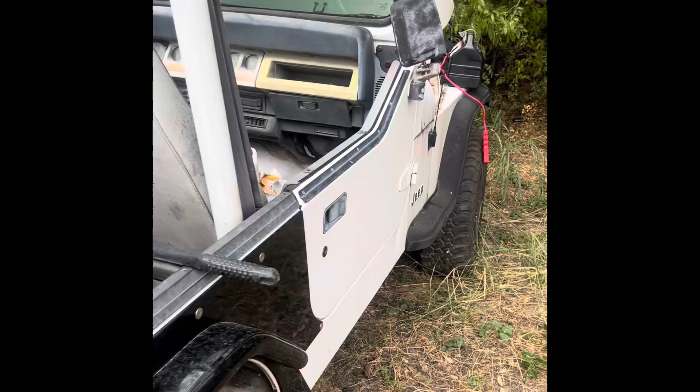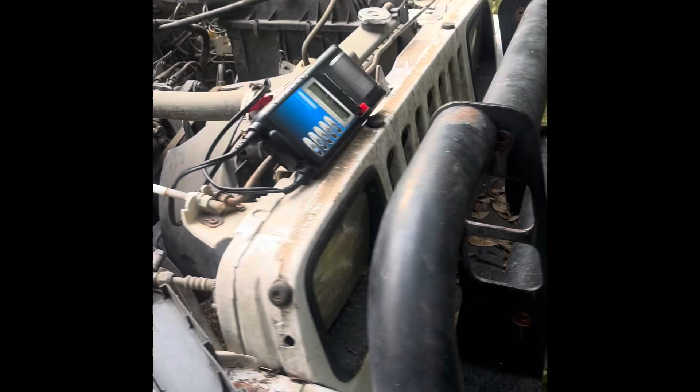Alright guys, look what I found sitting in somebody's backyard. We negotiated a price, and yeah, this is gonna be mine. So I just put an old battery in it to make sure we get this thing cranking. Found me a YJ. I had one before, fixed it up nicely, ended up selling it, and regretted selling it. Glad I found another one.

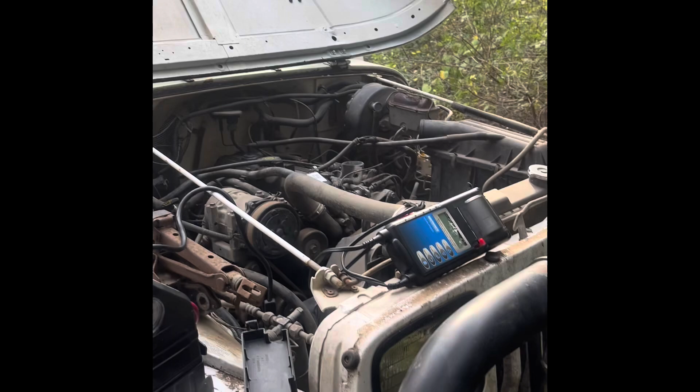I'll be posting about the progress. Here we are, show you some of the progress we made. Hopefully.

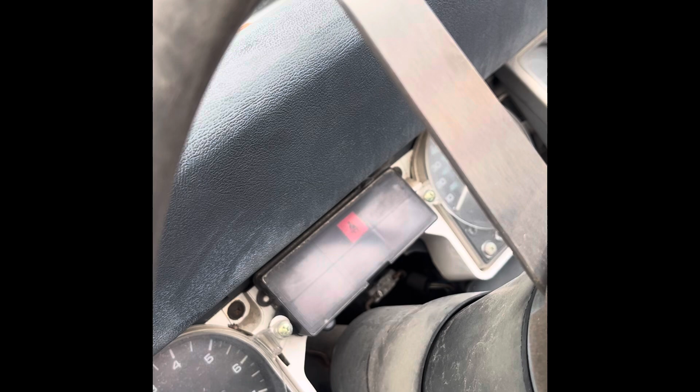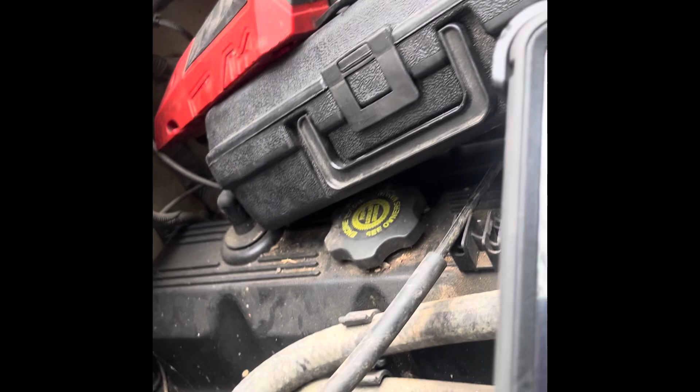It's cranking, but no check engine lights coming on the dash. I'll show you guys what I found so far. It's possible that light bulb could just be burned out, but I'm looking at the wiring diagram, and it shows the automatic shutdown relay.

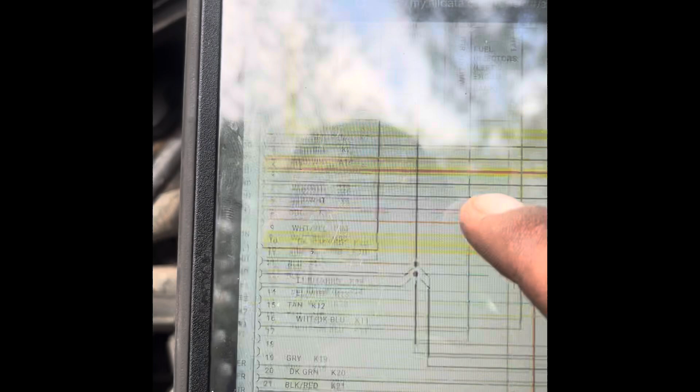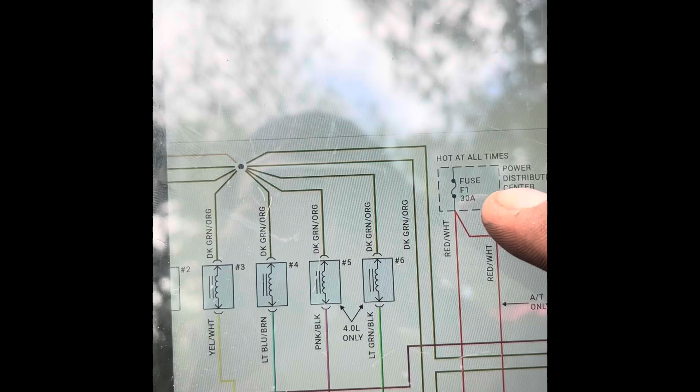It sends power to the computer. It's fed through two fuses, fuse 5, which I think is inside the dash, and the other one would be fuse 1. This one feeds down to the fuel pump relay, and also comes back and shares power, as you can see. So it feeds one point on the automatic shutdown relay.

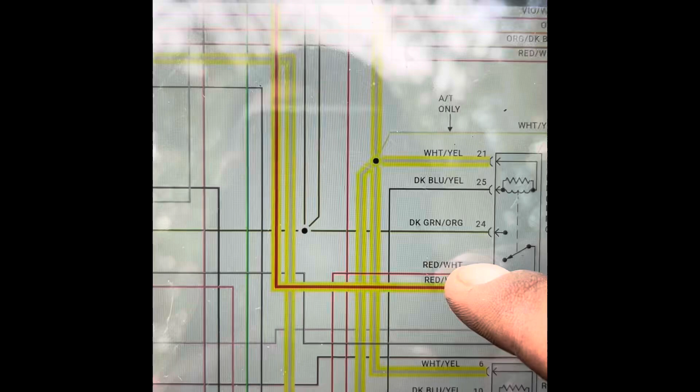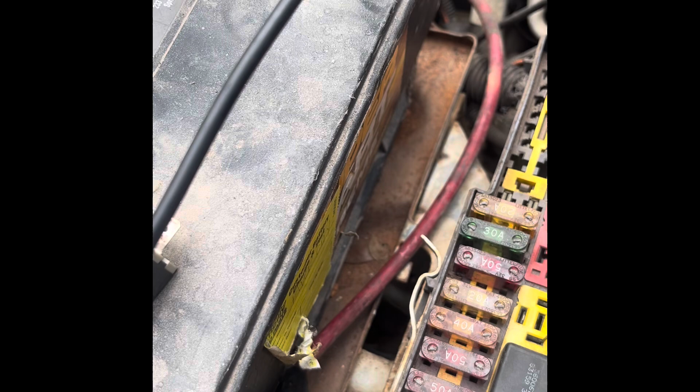So essentially we should have two powers on this relay, and I only have one. So here I'm at, I got it grounded. We have one power source, but these other ones, nothing.

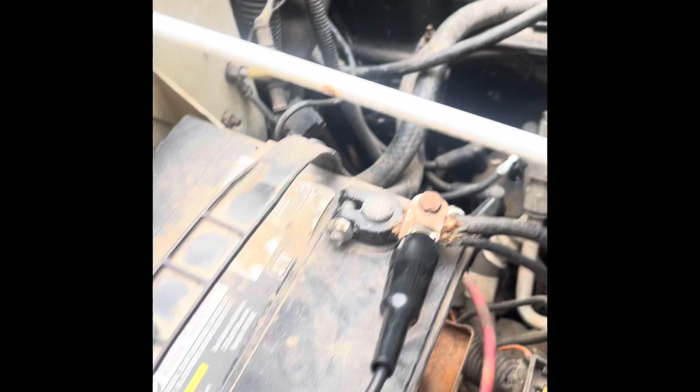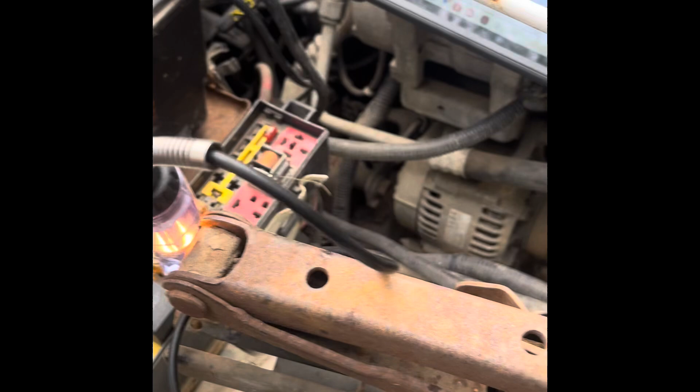So we're gonna look, to show you, this power source is coming from fuse 30. As soon as I disconnect this fuse, there you go. I'll put it back in.

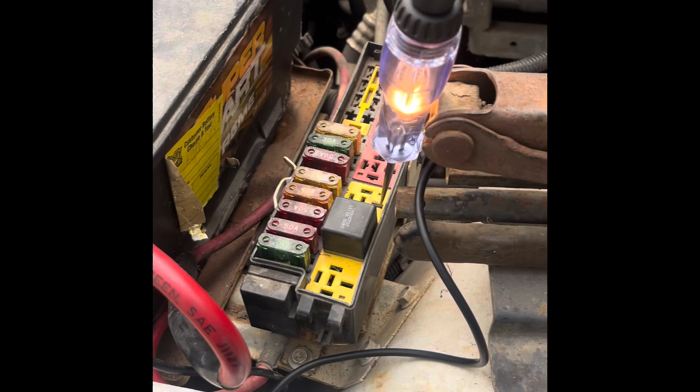Apparently this car has been sitting here for years. People could not figure it out. I think I'm on the right track here. Wish me luck, guys. What we're looking for now is this fuse right here.

This other fuse I should be feeding hot, in run and start. I should be feeding this one.

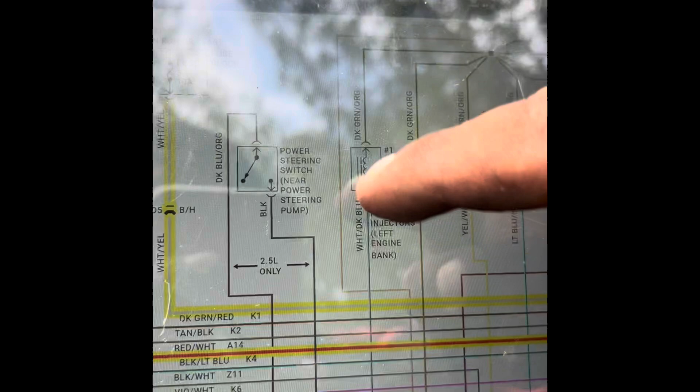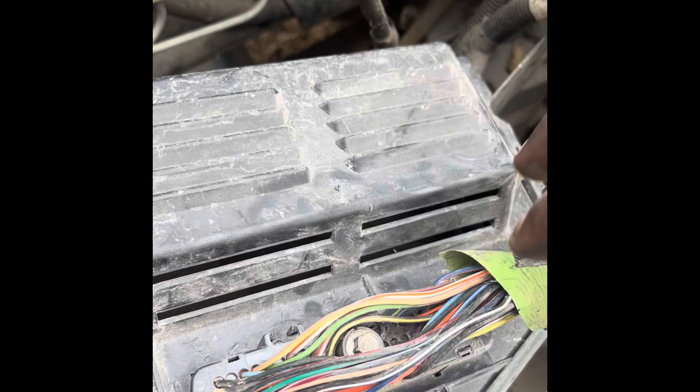Still on the Jeep. Alright, so I got the computer, it's usually located right here. All I did was take these bolts out so I could move it up and do some testing right here. We're gonna be looking for powers and grounds on the computer.

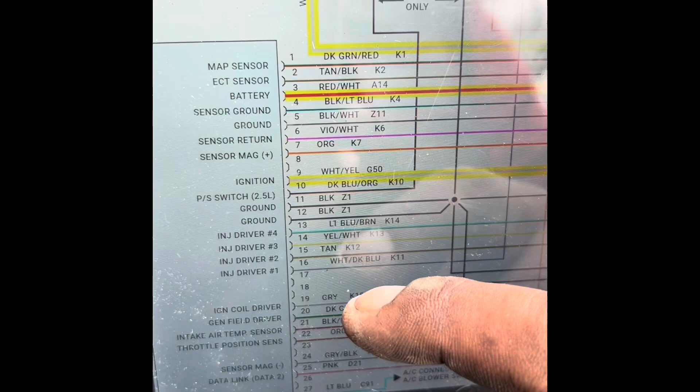So from what I've read so far after doing research, I only find two power sources, which is pin 9 and pin 3. And then we have ground. There's a couple more grounds, on pin 5, pin 11, and 12. So that's what we're gonna be doing right here, I'm gonna be testing all these.

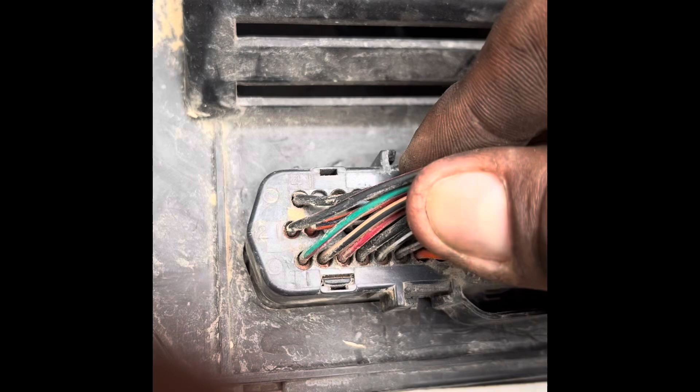This computer is numbered so you can actually see, 1 through 20, 21 through 40 over here, but it's dirty. Focus. And then pin 41 through whatever, 60.

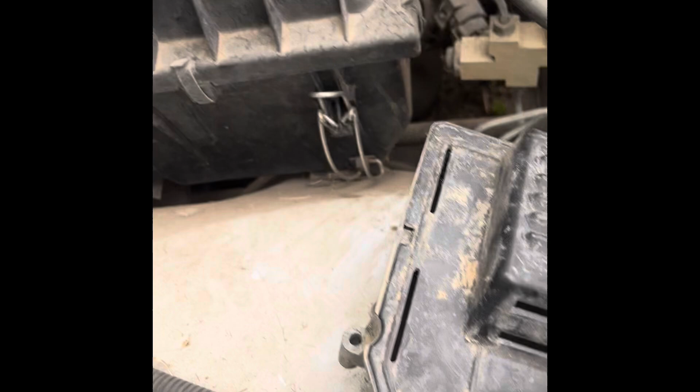So we gotta be checking pins 3 and 9 for powers, and then we'll be checking ground on 5, 11, and 12.

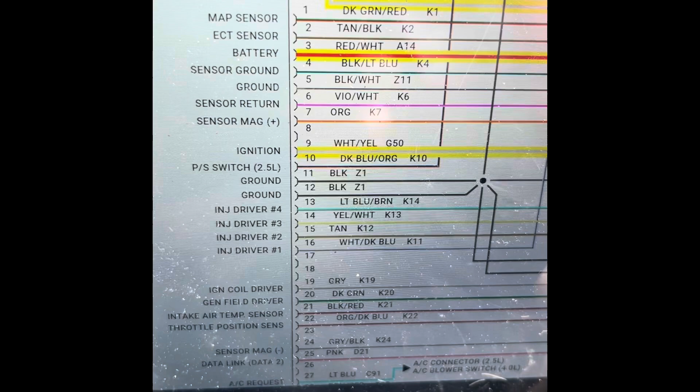Here we are to it. This is pin number 3, 1, 2, 3. Split. Got the ground. Then we gotta find pin number 9, 3, 4, 5, 6, 7, 8, 9.

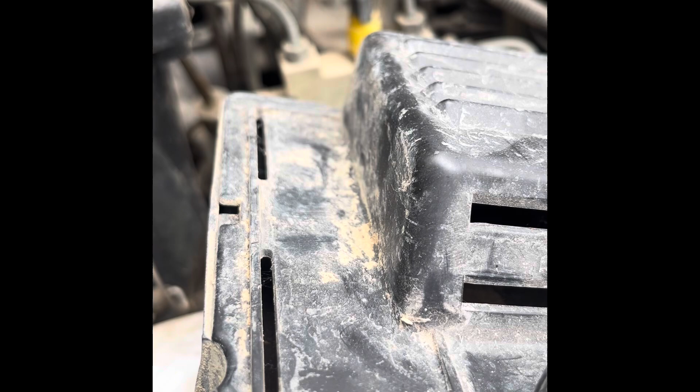Okay, looks like 9's not lighting up. Hopefully we're onto something, let me double check. 1, 2, 3, 4, 5, 6, 7, 8, 9. Alright. Nothing here.

Even pierced it a little bit. I'm gonna set it back up. It's my Jeep, guys, so don't give me a hard time about it. But yeah, there's no power getting to it. Hopefully we're onto something there. I don't want to have to replace this PCM.

Alright guys, I'm still on this Jeep. It's becoming a head scratcher for me, honestly, but this is the PCM. I checked it, it has 2 powers and 3 ground sources. I checked all of them, all testing fine.

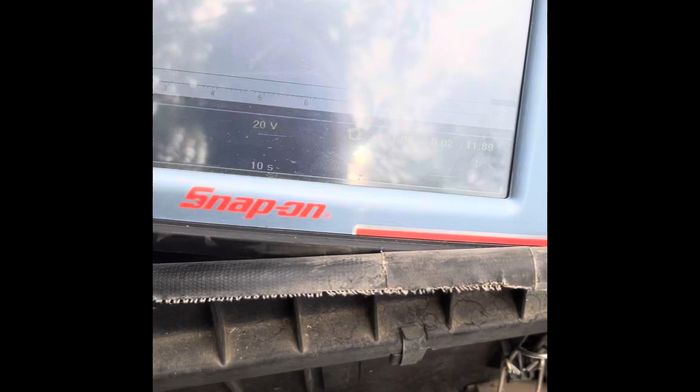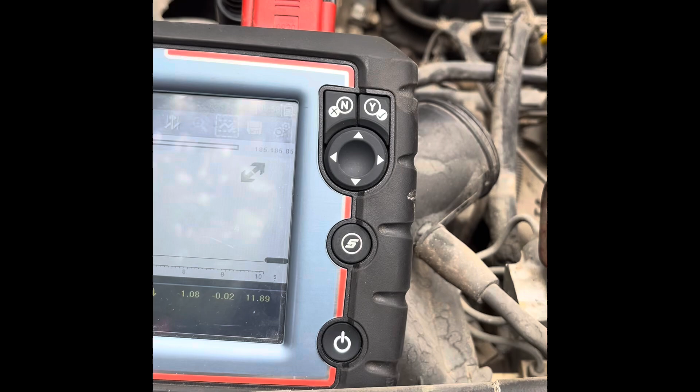Currently what's going on here is I've noticed that we're having no power getting to the injectors. So I have this multimeter connected to the injectors. The auto shutdown relay is over there. Basically, that wire for the shutdown relay comes all the way to here, to pin 51. I will show you on a diagram.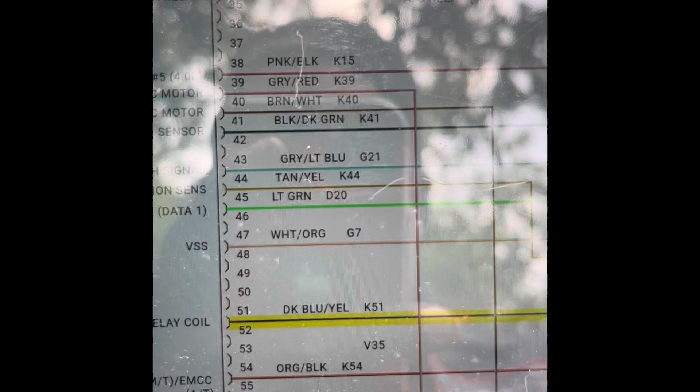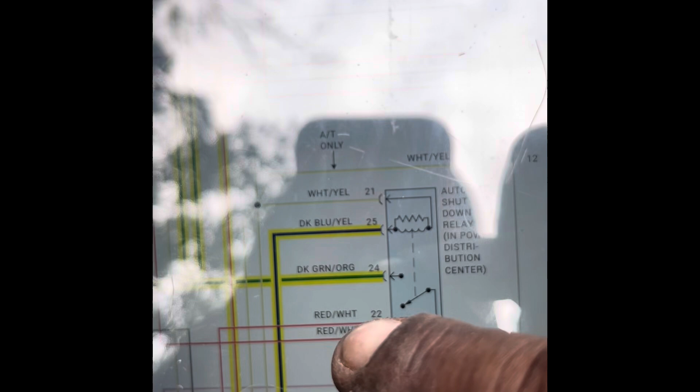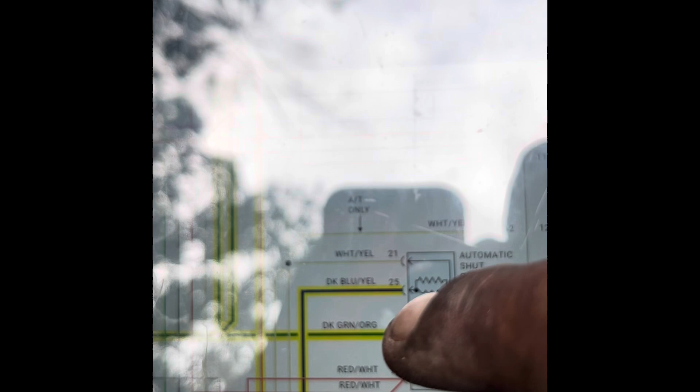Let's follow this relay coil through. It goes to a fuel pump relay. Essentially what's supposed to happen is this power source is supposed to get grounded by the PCM here. When the PCM grounds it, that's the automatic shutdown. So you see how it goes, bam, shut here, and right here is looking for ground. When this is grounded, this magnetic field clicks and pulls this power, which I already checked here on the auto shutdown relay. What we're finding is this dark green orange cable is not getting powered up.

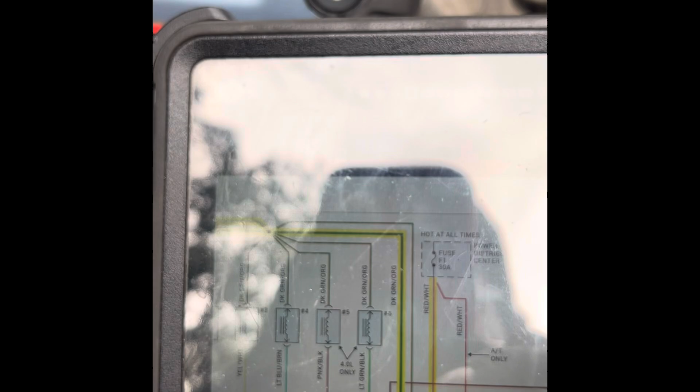This dark green orange cable also powers various other components. So where I'm testing, if you follow it, it goes to the injectors too. Right here is injector number 1. There's a green and orange cable right here, so it shares it.

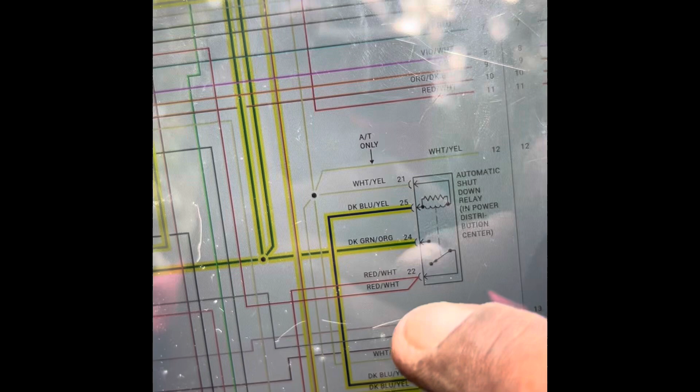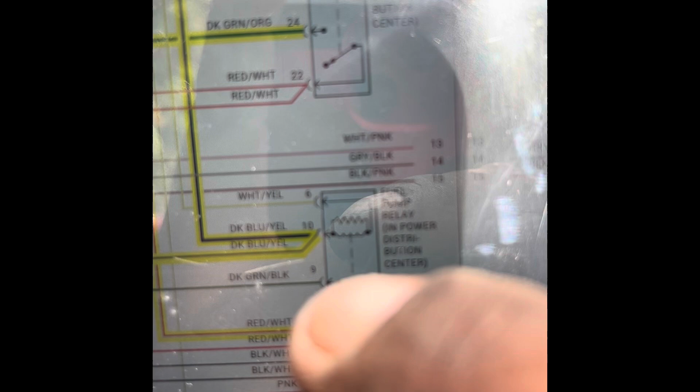Here's what I found so far. When that green and orange cable, the automatic shutdown relay is supposed to activate. When it activates, the way it's gonna get activated is this is gonna find its way through this wire right here to the computer. So that computer is supposed to ground it to create a magnetic field here, and essentially pull this power source up to the dark green and black.

Once this thing gets magnetized, this power gets pulled up, and dark green and orange will distribute. This relay will distribute power all the way to the injectors. So now I'm on injector 1, orange and green. Dark green and orange feeds a lot of other stuff.

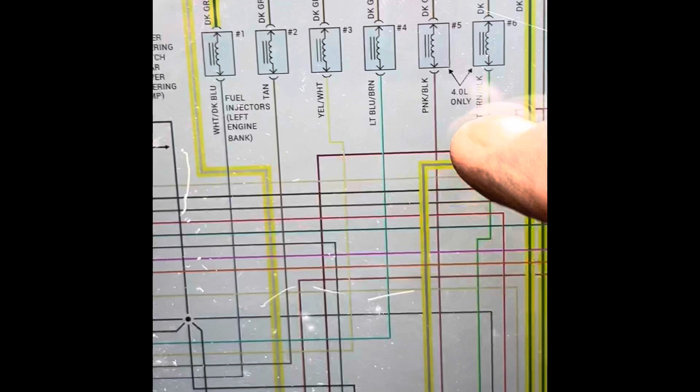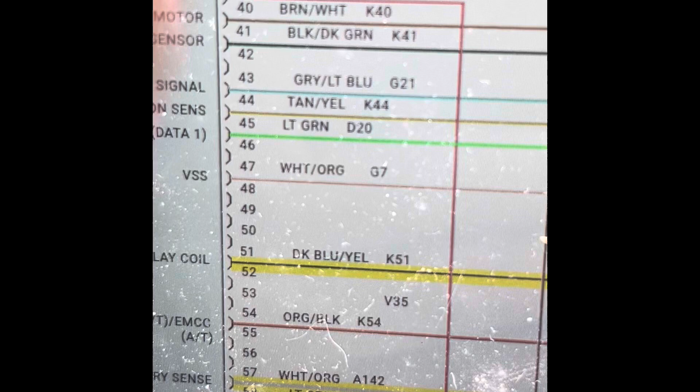This relay is not grounding. When I ground it, pin 51 on the relay coil, dark blue and yellow. Here's dark blue and yellow, this is pin 51.

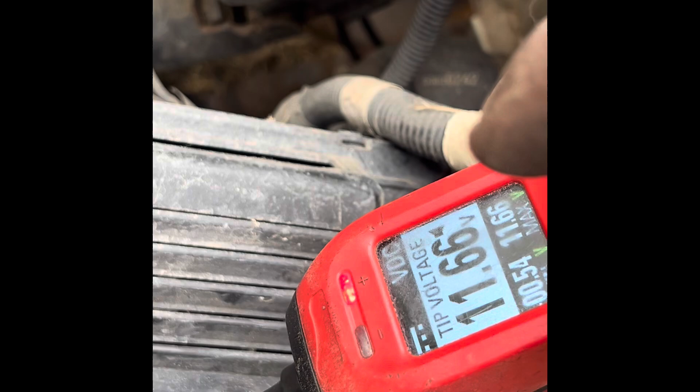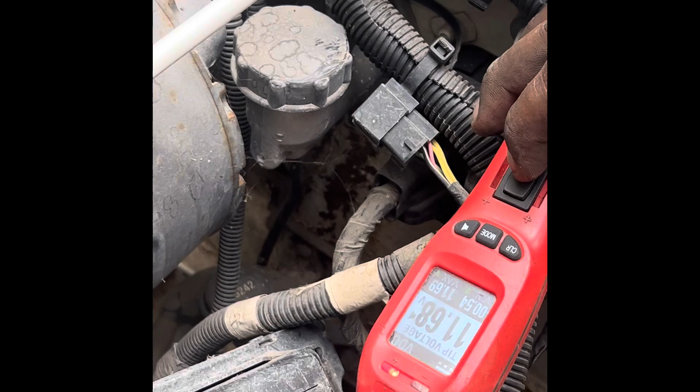The computer is supposed to ground the circuit. Right now we have no power. I'm gonna go turn the key. On position, as you can hear, it reactivates and there's still no power here. So this computer is supposed to ground this circuit, because right now we still have 0 volts to the injectors. I'm gonna ground the circuit, and hopefully you'll be able to see that we get power here now. I'm gonna ground it, and bam, now we've got power to the injectors and various other components.

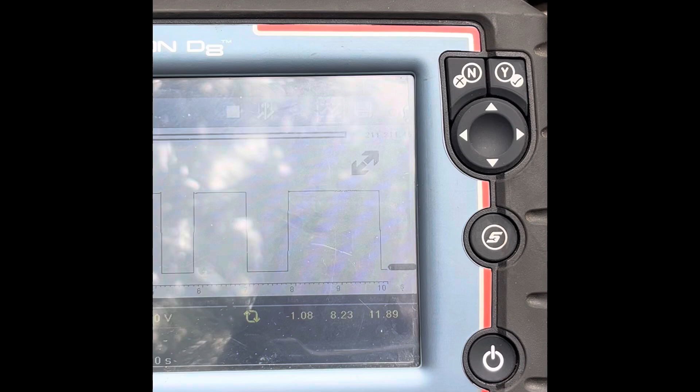So this computer should be grounding the circuit, and it's not grounding it. I checked powers and grounds on it. I feel pretty confident to be able to condemn this computer now.

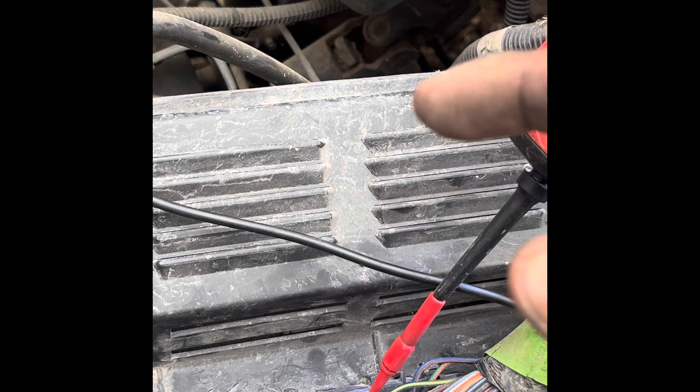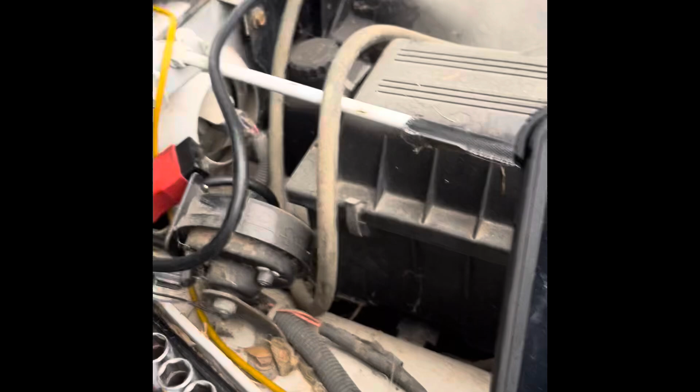Alright guys, that's what I'm gonna show so far, at least for today. I think I'm gonna have to open up this computer, but this is pin 31, which is a pin that will turn on the check engine light.

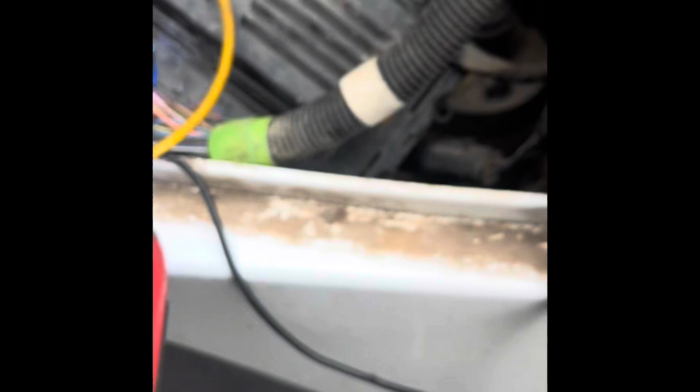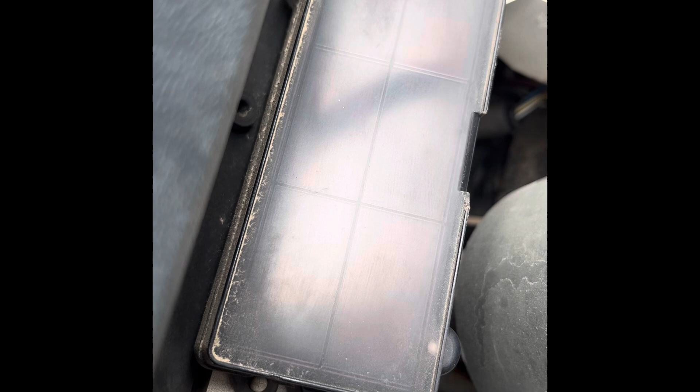Couldn't get voltage on there. Let's see if I can catch this on camera. So the other thing this computer is supposed to do is ground this circuit to turn on the check engine light. See, now we get the check engine light coming on when I ground that circuit. That's also what the computer is supposed to be doing, it's supposed to ground the relay, it's supposed to ground the circuit. It's not doing it.

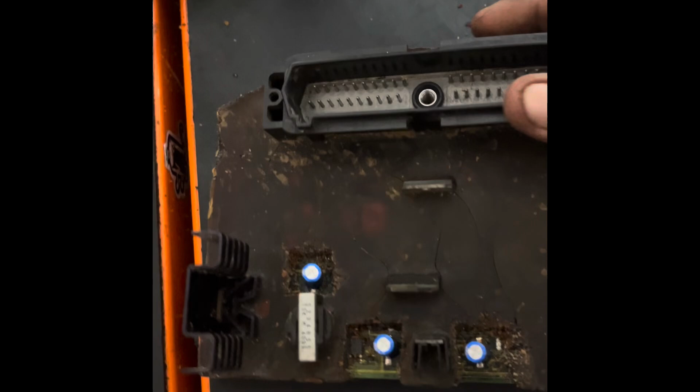Alright guys, it's Halloween 2024, so I had to put this on hold to go trick-or-treating with my kids. We came back, they're in bed, it's 11 o'clock at night. I just finished putting these capacitors back on, these are the new ones. Tomorrow we're gonna go hit the Jeep and hopefully this thing fires up.

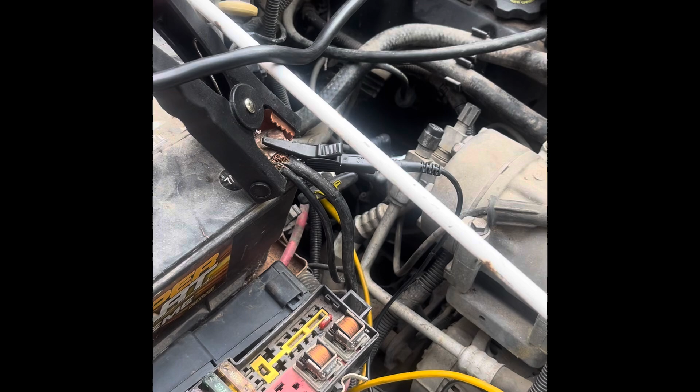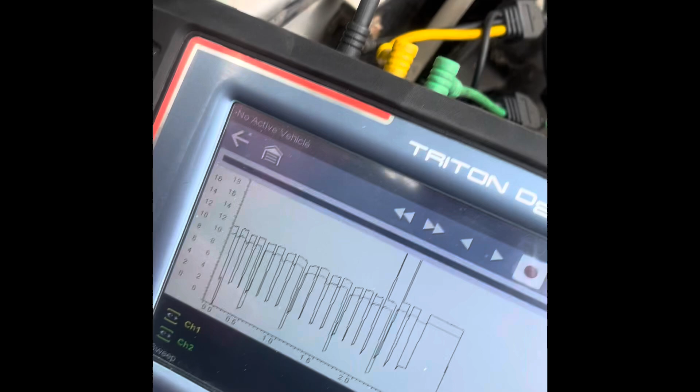God, I hope so. Alright guys, it's still crank no start, but now I'm getting power to the coils and to the injectors, and not only that, I have two traces right here. I'm getting computer control, so we're definitely improving here. I was not getting power to the injectors before, now I do, and I got pulse width.

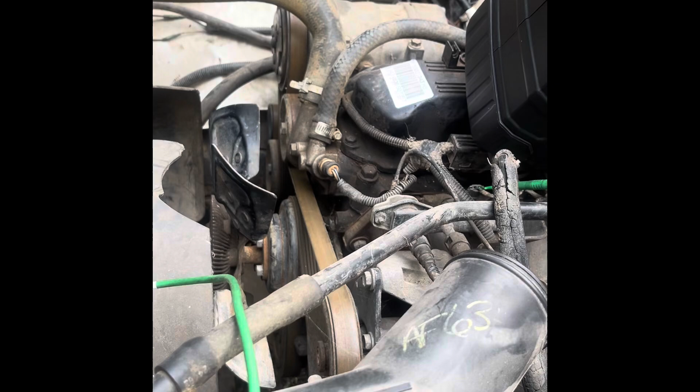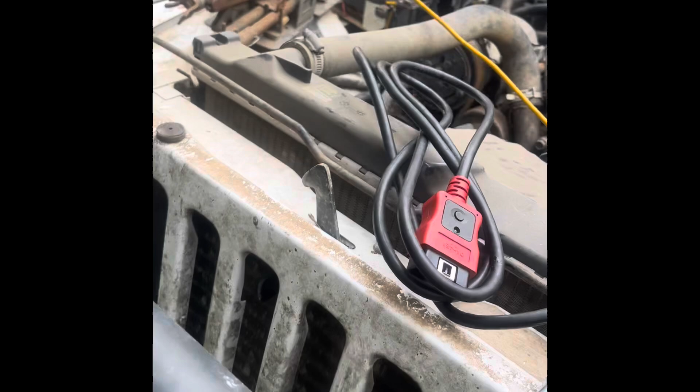I don't know, maybe it's just old fuel, or maybe the spark plugs need to be replaced. I broke one on the way out. The distributor cap is messed up. Not sure if that lack of insulation on that probe is really affecting the spark getting down into the distributor cap.

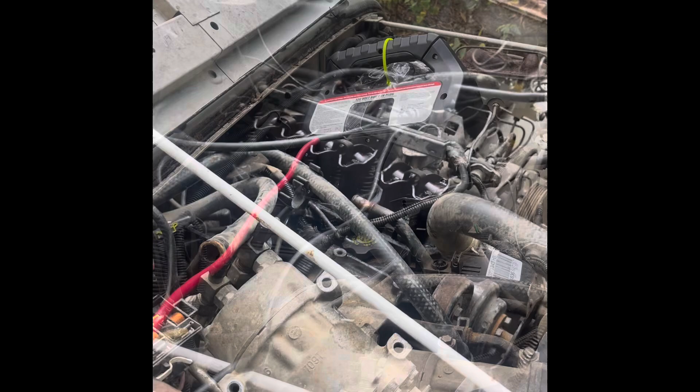But computer's working. All right, guys. I've been recording every single step by step. Yesterday, me and my son came over here to help me get these things started.

So what we did is, the cylinders were kind of low on compression. We put oil in each one of them. Compression came up on all of them except for cylinder number 3. Cylinder number 3 is hovering around 60, maybe 70 psi. So we did get it running, but when it was running, it was ticking and misfiring.

Another issue the truck has, and we already checked this, is the fuel pump itself is failing. We checked the wiring down to the fuel pump, and it's okay. The fuel pump needs to be replaced, and there's also very low fuel in there. Even when I try to power up the fuel pump directly, I cannot hear it activate. So the fuel pump's gonna get replaced.

But right now we're trying to adjust this weak cylinder, and we'll see what's going on here. This one feels stiff. All of them have a little bit of play, but this one right here is really hard. So we'll see what's going on right now. Yeah, go for it, mijo.

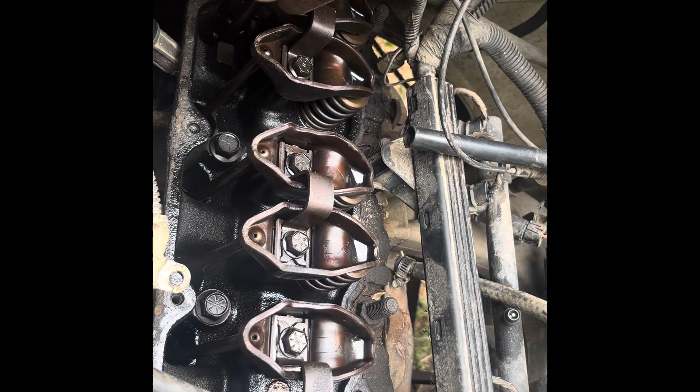Yeah, that's working. Okay. Do it one more time? One more time? Yeah. Okay. Damn, maybe it's a damaged valve.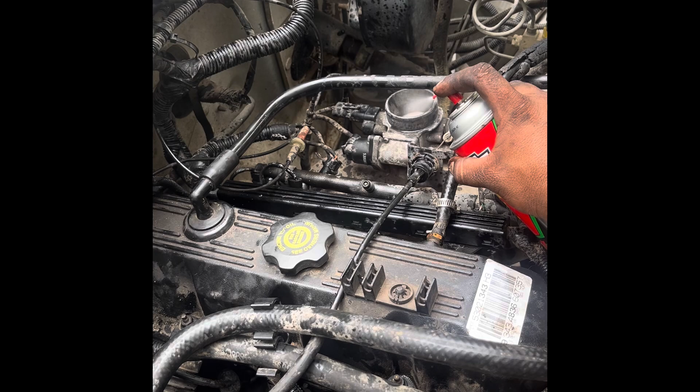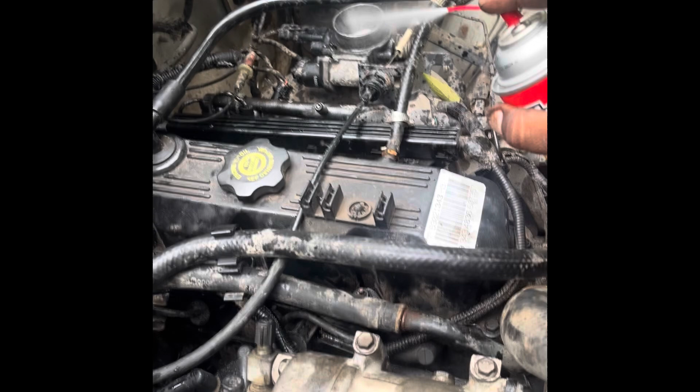These actually sound pretty good now. Yesterday it was tapping hard, tap, tap, tap, tap, tap, tap, tap, tap. But now it sounds good.

Okay, we're just down to the fuel pump now, guys. Alright, guys, this is the old fuel pump. Here's a new fuel pump about to go in, nice and fresh. Power wash the inside of the tank and the outside just to make it nice and clean. And yeah, it's coming together.

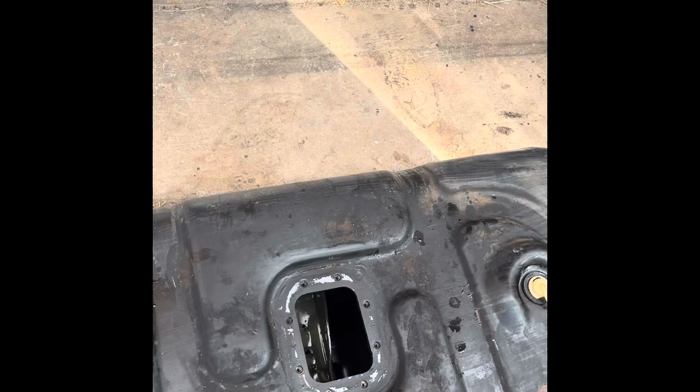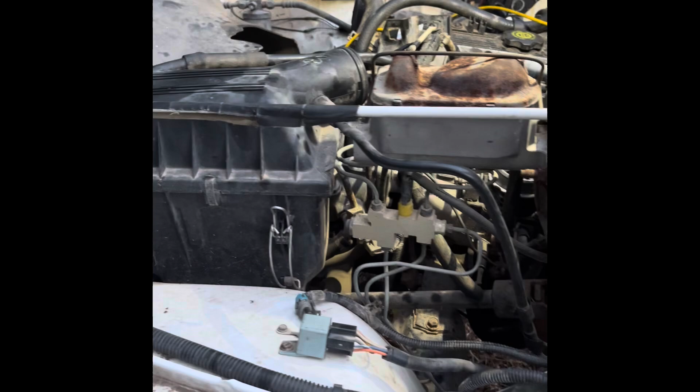Alright, people, we're back here at the Jeep. Goddamn Jeep. Got the fuel pump, new fuel filter. When the fuel pump ran, fuel leaked right out the fuel filter, so we put new hoses. And here's where we're at now.

I got the injectors out because we got the correct fuel pressure up on the fuel rail. I tested it through this port, but the car's still not starting unless I put fuel through the throttle body. I might demonstrate that for you.

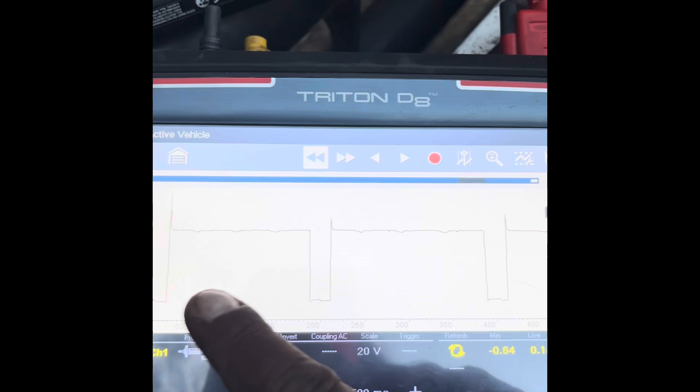Anyway, so I took my lab scope. Typically on a good working injector, this spike will be much higher, and on the way down there'll be a thing called a pintle hump, a little bit of a bump, indicating that there's a magnetic collapse happening, showing that the injectors are opening and closing. In this case...

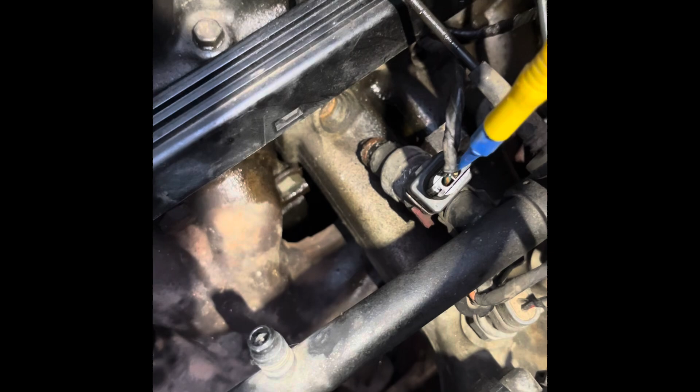I'm just checking on injector number 3 in this case. I checked 1, 2, and 3. It was the same signal on all 3 of them.

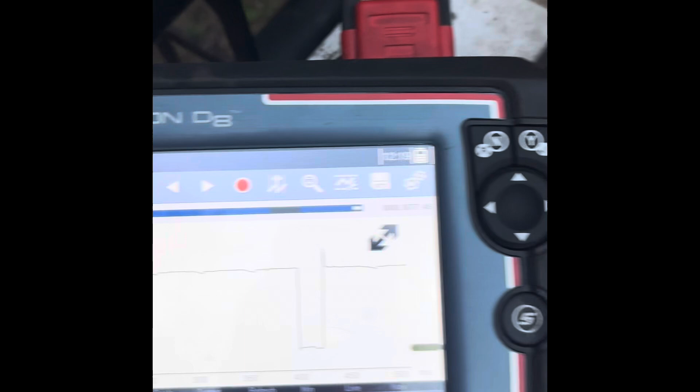So what I decided to do is pull the injectors out, crank the vehicle, and we're about to do it so you guys can see. We're getting 12 volts and computer control, but all of these injectors are stuck, even though we got proper fuel pressure here. I'm gonna have my son crank it up for you guys real quick, and I'll show you that none of these injectors are injecting. Start it up, son.

Not a single spray. Again, mijo? All right, damn it. Okay, I just got the new injectors in.

About to throw them on the rail. Get you an image of that. Let's have them on them.

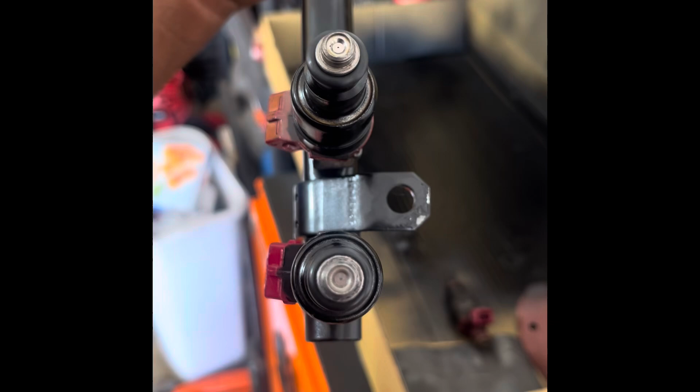Notice something right now, I checked out the box. All boxes have the same part number, but... one port. Oh, come on. One port. Focus. God damn it.

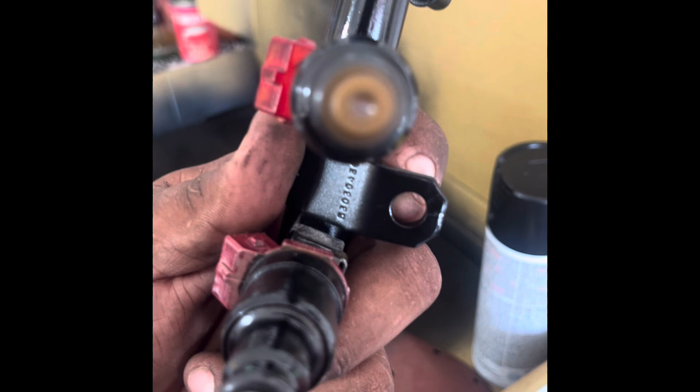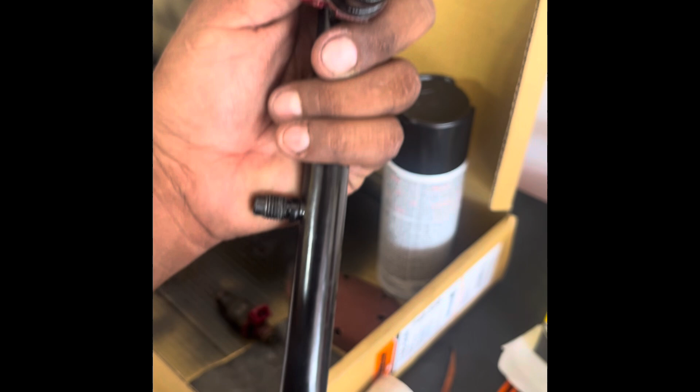We got 4 ports. What the hell? I don't know if it's gonna affect... I don't know how this is gonna affect performance. I would prefer if all of them were 4 port.

Alright, guys, we're back at the Jeep. I just finished cleaning out the ports here. Got the fresh injectors lubed up. We're about to go in with them.

There she is, guys. Purring like a kitten. Finally got her driving. Stick shift.